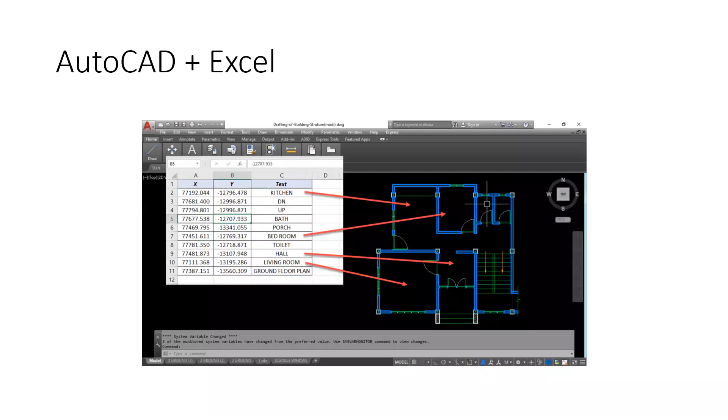Okay, so this is a very good decision, and I think they will be a game changer in the future because now they have expanded their business to the Saudi Arabian region. And very good news for you, ICC, International Construction Consortium, is also going to expand their business into KSA, Saudi Arabian region. So it will be a very, very good opportunity for Sri Lankan quantity surveyors.

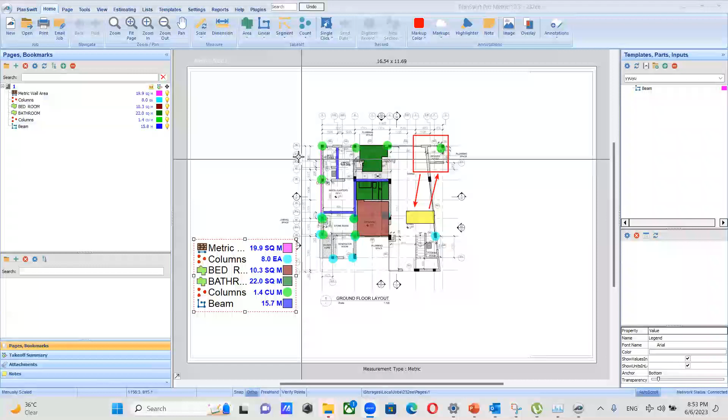A lot of people think this PlanSwift software is a very basic software and very easy to learn. But in order to get the fullest efficiency out of this software, you have to learn it in depth. I will explain one by one. This is very, very interesting. Please observe. I will share my screen. Yes, this is my PlanSwift software. This is a very popular software among construction professionals.

I will go to new and start a new job. I will put 67676, then I will put a description as training new batch. Then I will click next. Then I will select a drawing, click next, click next again, and finish. So this is a drawing I have put into this PlanSwift software. You can see this is a PDF drawing. Now you can measure this drawing very easily.

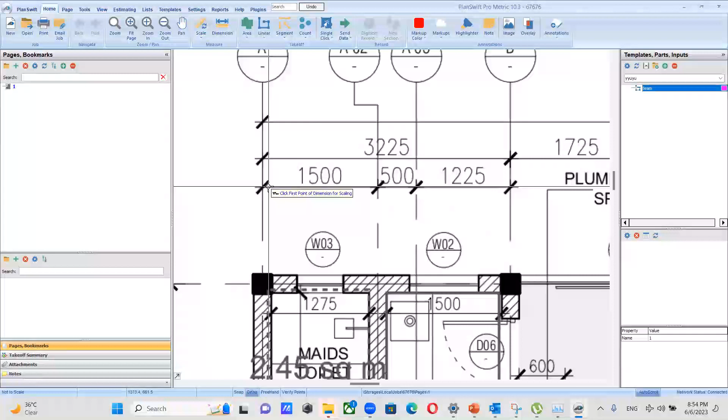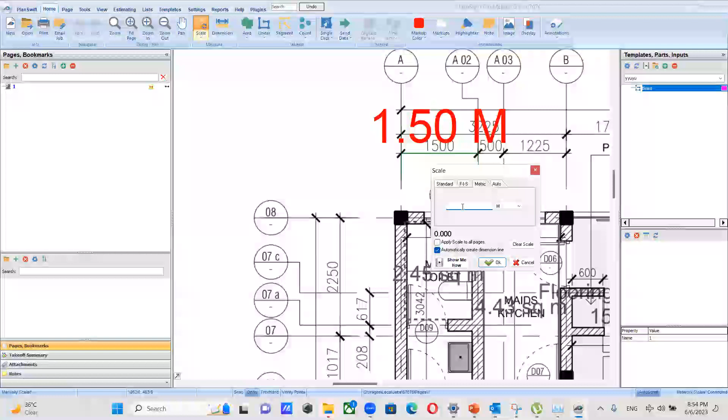Before measuring the drawing, you have to scale the drawing. How to scale the drawing? You can go to the scale, then give a scale. This is 1.5, then click OK. Click here and click here. Now you have to scale here to here, and here to here also. Again, you have to click on the scale. Then this is 2.250, and click OK. Then you can scale this as well, here to here. Very easy.

Okay, now you have scaled your drawing. Now you can start the measurement. You can do all the measurements by using this Planswift software very easily. So if you want to count, you can click on count and I will rename this as column. Then I will click OK. And you can easily count 1, 2, 3, 4, 5, 6.

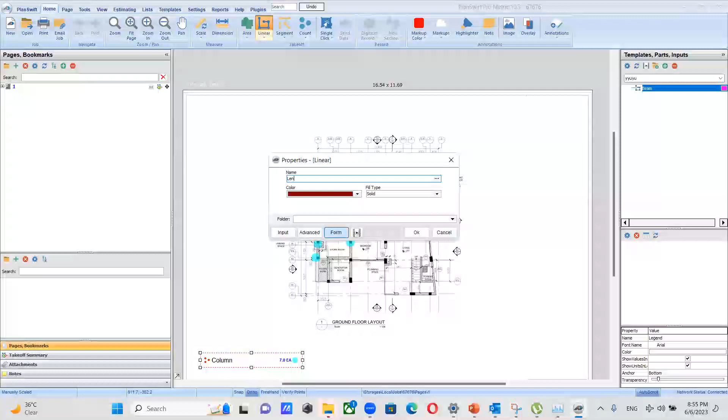Likewise, you can count. After you right click and click on stop, then you can again right click and show legend. You can see the quantities as well like this. So this is how you can measure by using this Planswift software. Not only this, but also you can get linear measurements, so you can measure length of wall. You can get the linear measurement like this. Very easy.

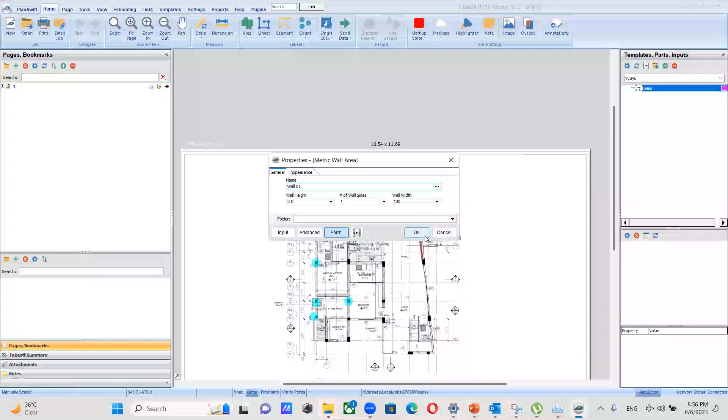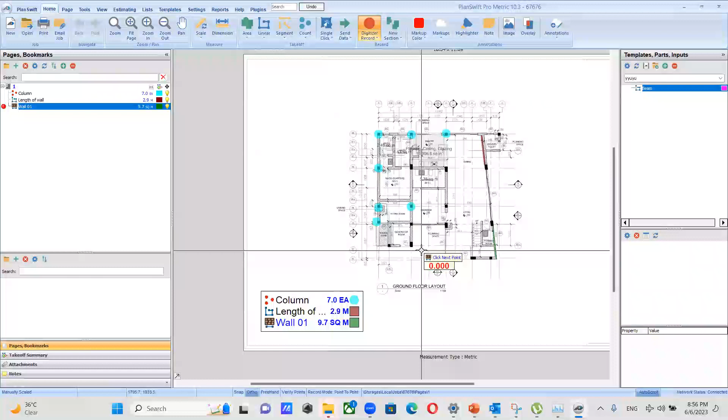Here, if you want, you can get wall area. So you can give height to this wall. This is wall number 1. It's very simple. Like this, you can measure the wall height. Sorry, wall area. So this is wall 1 area. Like that, you can do all the measurements by using this Planswift software.

So I will show you another trick. If you want to measure the manual area, I will measure this particular area. You can easily do it. You can easily measure the area like this. So you can do it very easily.

And if you want to measure the area automatically, you can use this single click option. Then you can rename this as storeroom and get the quantity very easily by double clicking. Like this, you can double click and get the quantity. See, double click and get the quantity. Nothing to worry about. You can get the quantity very easily. So likewise, there are a lot of methods to take off quantities by using this Planswift software.

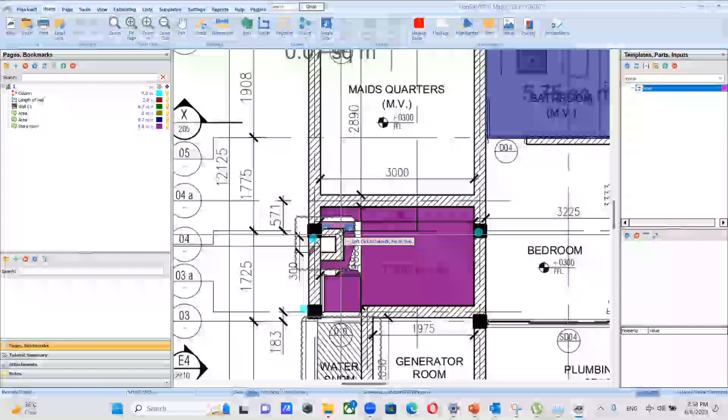So, but what is the difficult part? Sorry. What is the difficult part of this? So we have to address that difficult part. These are just regular measurements. We can measure area, we can count, and we can measure the length. So these are regular measurements.

What if we want to measure the formwork area of our beam? What if we wanted to measure the area of duct? So we have to measure those kind of things. That is the complex area of this Planswift software. Personally, I feel this Planswift software is a coding software. You can create your own measurements and you can measure after that. So that is the beauty of this Planswift software.

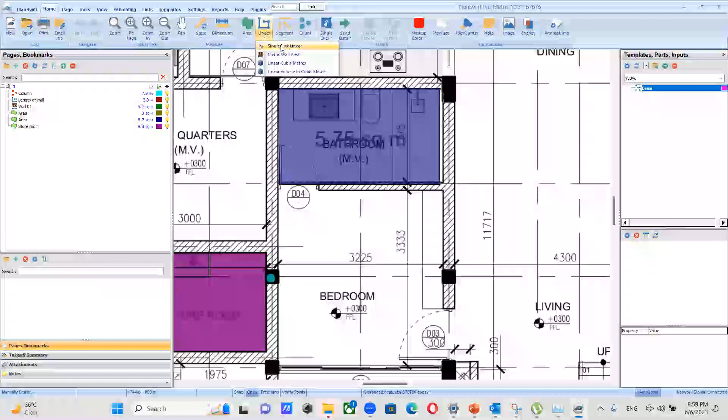I will start with a very simple example. This is very easy. I will get this particular column. I wanted to measure the formwork area of this particular column. We can easily do it by using this wall area method. We can get this linear and click on this wall area, and you can give the height as 3 meters. Then I can click OK. Then we can measure like this. So like this you can get the formwork area for the wall.

Okay, please mute your microphone.

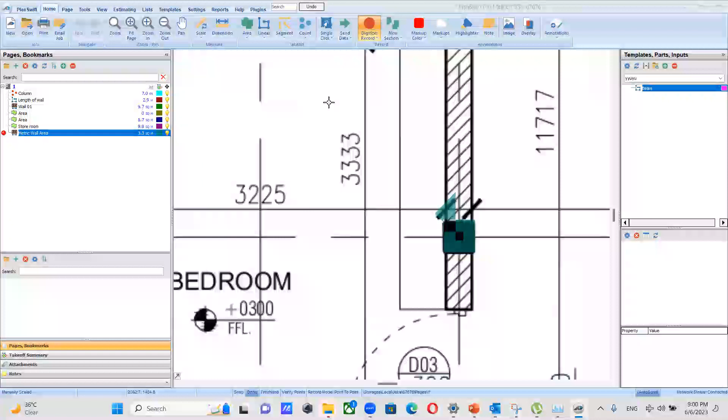But we can use a different method as well. I'll show you how to do it. I'll delete this particular measurement. You can create a template. You can easily go to these templates. Then you can go to this new tab. I will rename this as training one. Then I will click OK.

Then I will use this count function to measure the formwork area. I'll give this count. Then this is formwork area. Then I will click OK. Then I will double click on this and I will go to advanced. Then you can create your own formula for this particular element. This is very simple.

I will click here. So I need the width, length, and height of our column. So this is width. Very simple. Then I will put it under estimating. Don't think about these things right now. Just observe the process. This is length. Very simple. I will click OK, and this is height. I have length, width, and height.

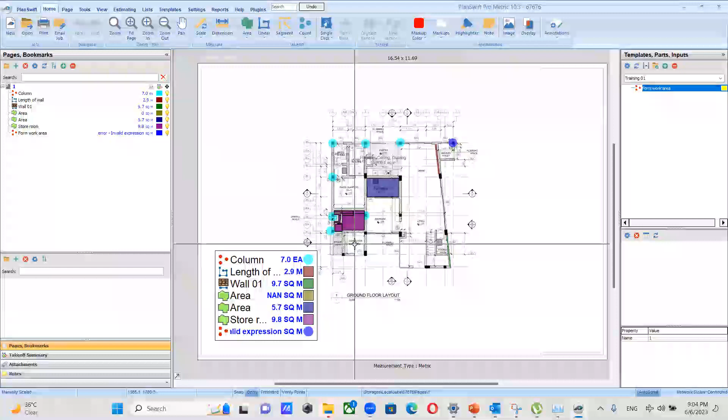Take off. Okay, I missed the multiplication sign. Okay, so you have to be careful. I'll double click this. Okay, then again, formwork area: height 3, length 0.225, and width 0.225. Then you can take off quantity, okay, like this.

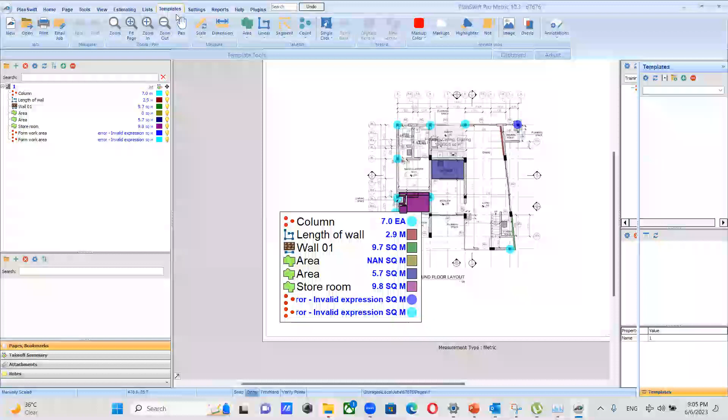Go to templates. I'll change from here. Multiplication sign, and click OK. Then I will come back.

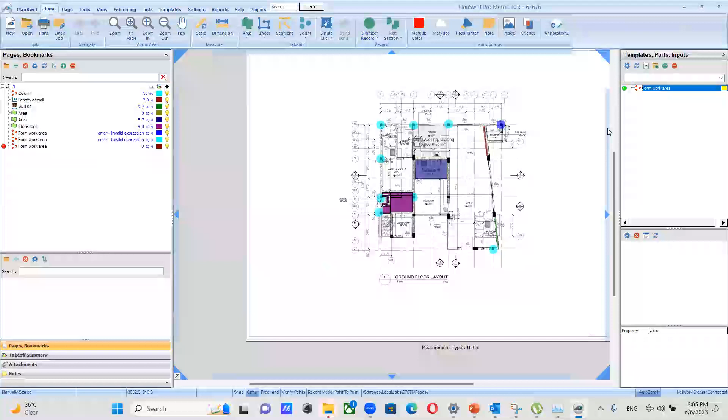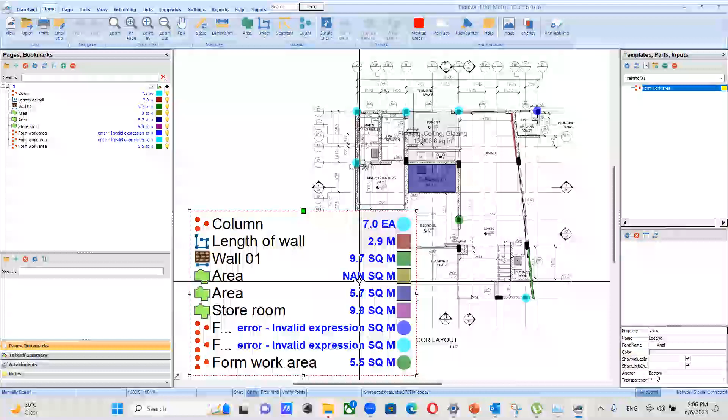Then you can see this is formwork area. You can see the quantity as 5.5. Okay, so likewise, you can create your own template and measure entities. Okay, so this is a very good example for that. And I will do another example. I will measure a duct area.

I will get this point where in duct measurement drawing, and I will click on next, and finish. Okay, so this is my duct measurement drawing. So I'm going to measure this particular duct. Okay, so I want the area. So this is very simple.

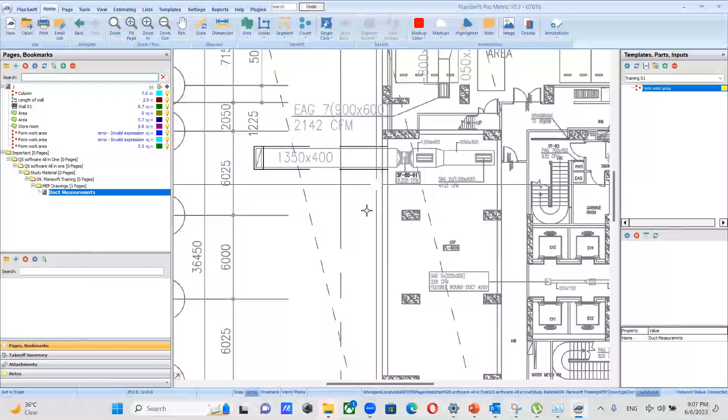We can go to templates and create a simple template. I can go to this linear measurement. Okay, so I will put as duct area. So I'll click OK. Then double click on this and click on advanced. So what we need to measure the duct area. Okay, so this is very simple. I will go here and I need width of this duct, width of this duct. Then this is estimating, and I will, okay.

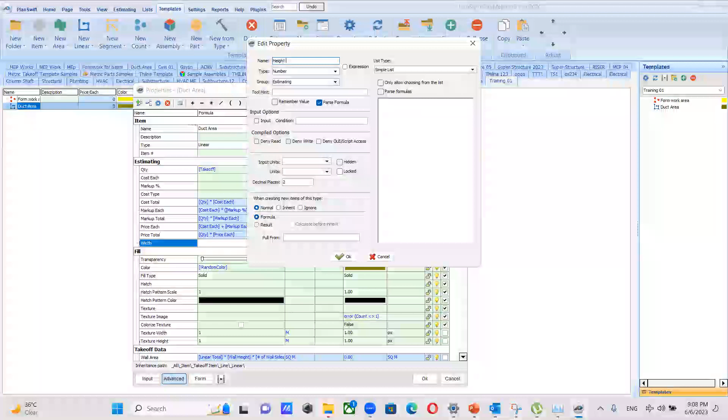Then I need height of this duct, height of this duct. Then I have already this length. Then I will add another one: this is sectional length. This is also important, this is the sectional length. Then I will put this little bit top.

Okay, then I will create the formula. So I can get the sectional length very easily by using 2 into width plus height. Okay, I hope you can understand this. So this is the sectional length. Okay, so you know.

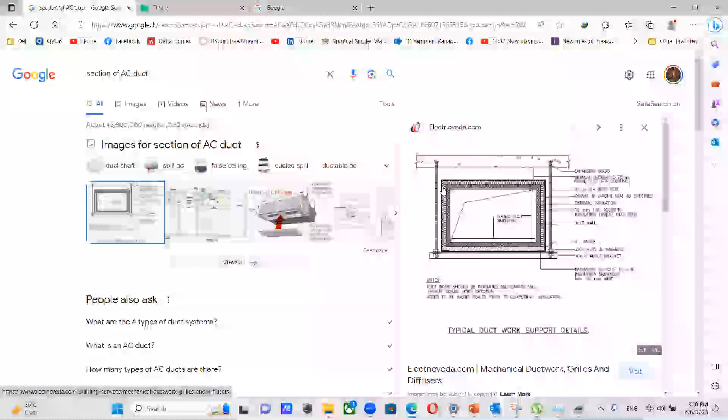If I show you a sectional... section of duct, AC duct. Okay, so you know, it's like this. Okay, this is width and this is height. Okay, so you can get this sectional length by using 2 into width and height, sorry. Okay, then you can get the sectional length very easily. Then you have to multiply this sectional length by the length.

Okay, so come back to this software. Okay, so this is width and this is height and this is the sectional length. Now again we have to give the units. This is meter, this is meter, and this is also meter. Then we can multiply this sectional length from this takeoff. Okay, then this should be square meters, no?

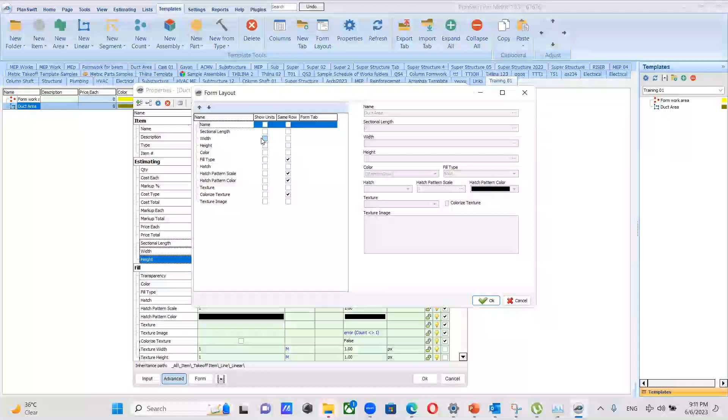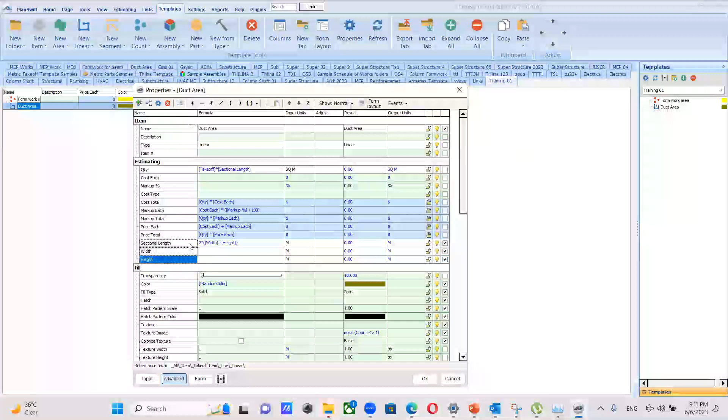Yes. Okay, then I will go to this form layout and add - before that I will add them to my form layout. Then I will give some units to these things. Okay, width, height, then sectional length also I will give a unit. Okay, so now we can start now. So this is the quantity and this is my formula. Then I can click OK.

I can come back to my home. Okay, then I can measure. So this is duct area. I will double click on duct area. Before that, I have to scale the drawing. So this is vertical scale 7.15, 7.150. Now click OK and scale the drawing first.

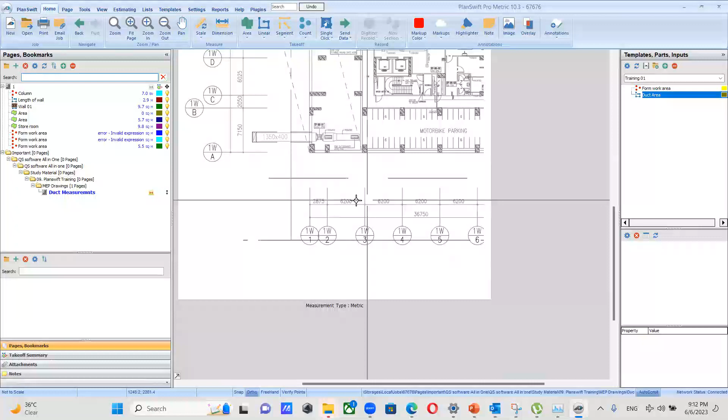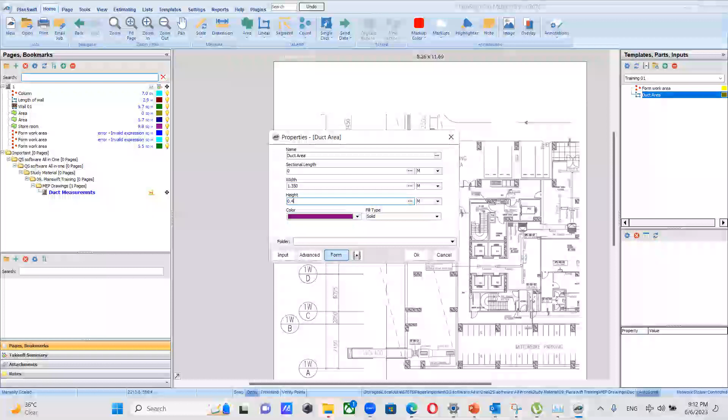Okay. Then I will scale this horizontally as well. Yeah, 6.2, 6.2. Okay, now I have scaled this horizontally and vertically. Then I can measure. Okay, so what is width? It's 1.350. Height is 0.4. Then I can click OK. Then I can start measuring. Okay, very simple. Okay, like this I can measure.

Then right click, stop, right click, show legend. You can see the quantity like this. Okay, so this is the magic of this Planswift software.

A lot of quantity surveyors and other construction professionals use this. This is very preliminary software. We can easily measure quantities by using this Planswift software. We have to only use this dimension, area, linear, segment, and count. Nothing to worry about. But if you want to get the fullest efficiency out of this Planswift software, you have to have very good understanding about these templates.

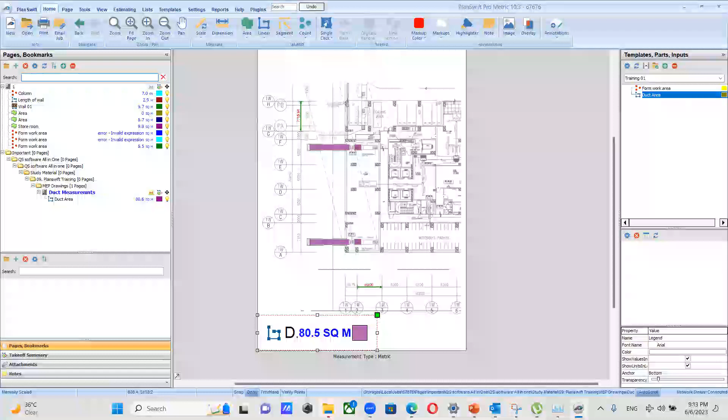So you can create your own templates and measure. I have created a set of my own templates. Then based on that, I can measure anything by using this Planswift software. I will show you. This is very important.

My lecture note. This is very, very important. Think about this: QS software all-in-one, then study materials. So these are my lecture notes. With these lecture notes, you can revise your memory anytime. This is lot 1, lot 2. This is my Planswift training note. This is for substructure.

This is the content. Under substructure, we will learn removing trees, site clearance, site preparation, excavation, earthwork support, excavate, plus retaining excavated material, backfilling, leveling, surface treatment. We will learn everything.

Then when connecting with Excel, existing quantity has to be considered. I will show you how to connect with the Excel software and directly put those quantities into the Excel software. So this is very important. I will show it in the lecture. This is very important.

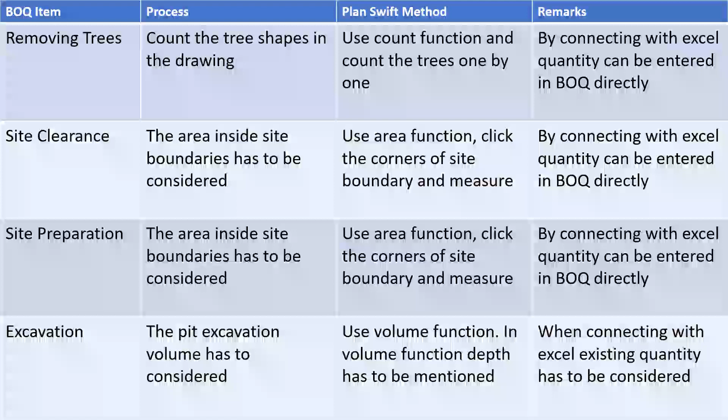So everything has been explained step by step by using these lecture notes. After finishing this lecture series, you can go through these lecture notes and revise your memory very, very easily. This is very important.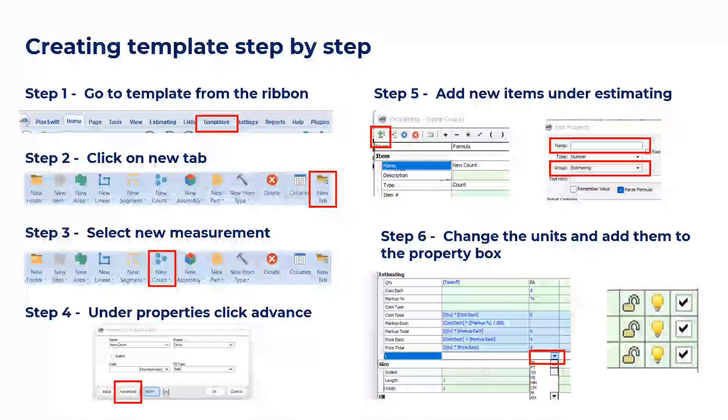Then I have introduced a new concept: pre-recorded video concepts. Sometimes you might miss the classes, so I have this pre-recorded video concept. If you miss any class, you can go through the pre-recorded video and get all the knowledge within a short period of time. If you want, you can go through the recording and grab all the things and...

Learn all the tricks. In this interactive training, I will teach you a lot of tricks, a lot of easy methods to measure, but the normal content I have recorded in a pre-recorded video, and you can go through the pre-recorded video and revise your memory very easily. Sometimes we forget things, so before the class you can go through the pre-recorded video and revise your memory and get ready for the class.

This is a very new thing, and nobody does this, but I have introduced this new concept. It's actually a huge disadvantage for me financially. What if someone gets these pre-recorded videos and uploads them to YouTube? It would be a huge financial disadvantage for me, but I took that risk because I want you to learn this software under any circumstance.

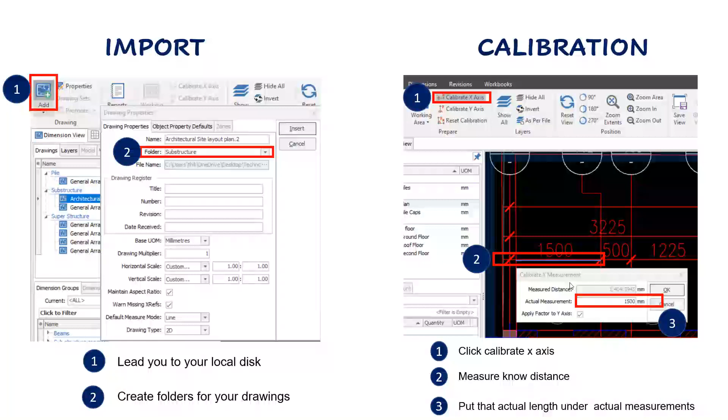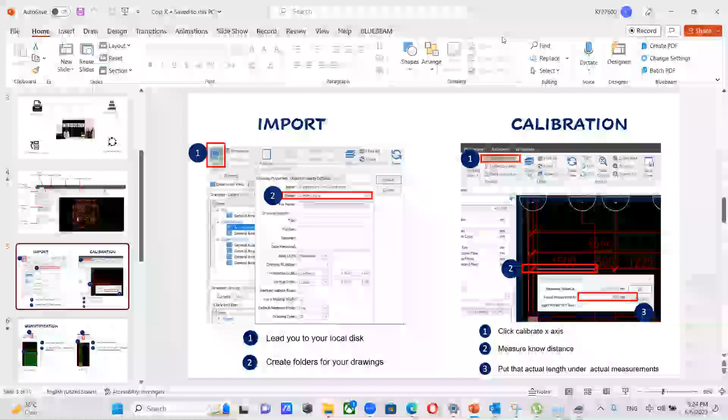Mr. Pradeep, I will show you the pre-recorded video I have prepared for that, so you can get a very good understanding of this pre-recorded video system. Please give me a moment, I will share that pre-recorded video of this wall part. This is very important.

It's a very good question, Mr. Pradeep, and with that question we can explain the importance of this pre-recorded video concept. Actually, it is a huge disadvantage for me personally, but I have to take the risk. Ultimately, Sri Lankan quantity surveyors have to gain the benefit of this. You will realize it with time.

Okay, so right now you might migrate to Oman or UAE or any other country and obtain a job and earn a lot of money. Okay, so yes, we have to work hard and earn money. Okay, so after some time we will realize we have to give something back to the society. Okay, so I also like that.

I started my career back in 2019. Then I worked very hard. Okay, so in 2021 I became the best sales manager for CCAS Private Limited. Then I completed more than 5 construction projects by using this CostX 5D software, and I earned reasonable money. Okay, now I realize I have to give something back to the society.

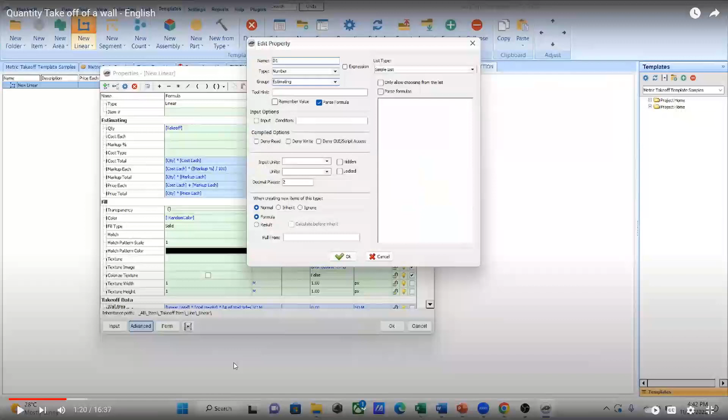Okay, as you can see, we can create a template for these walls. Okay, so this is a template. Okay, like this, you can create a template. So you can see quantity, width, height of D1, D2, like that. You can create a template.

Okay, so this is D1 quantity, this is D1 width, and this is D1 height. Okay, then this is D2 width, D2 height. Okay, like that you can create a template like this. So this is the template part. Then I will put units to this template. Then I will create separate sections for doors and windows by using this template function. Okay, I will explain all those things and I will train you interactively with regards to this wall creation.

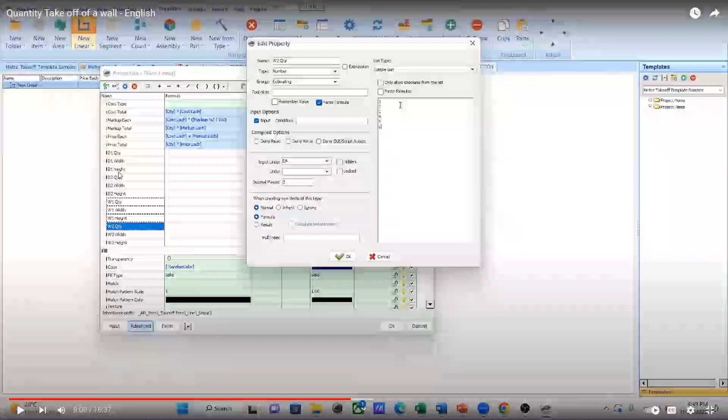Okay, then you can see this is a small formula. So this is D1 quantity, D1 width, and D1 height. If you multiply D1 width, D1 height, and D1 quantity, you can get the cumulative area of D1. Okay, then you can get the wall area by multiplying length of wall and height of wall. Then you can deduct these doors and windows by creating a formula. Okay, I will show you the formula.

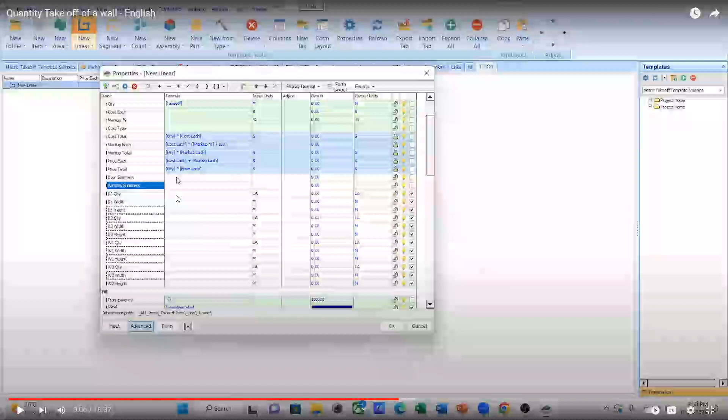Okay, like this, you can create a formula. So this is door summary. Door summary means D1 quantity into D1 width, D1 height, plus D2 quantity, D2 width, D2 height. Then you can get the cumulative area. So after getting door cumulative area and window cumulative area, you can easily deduct them from wall cumulative area. Then you can get the wall quantity very easily.

So I think this is a very good example for that. Okay, you can see. This is the formula. So everything I have explained in this video. So nothing to worry about. You can get a very good understanding about that. Okay. So I will explain those things under architectural measurement. So in fact, I will show you, Mr. Pradeep. I think I have the note for that particular section. PlanSwift training. I think under note 3. Okay, structural and architectural measurement.

Okay, my dear, please mute your microphone, my dear students.

Okay, so Mr. Pradeep, as you saw in that video, D1 quantity, D1 height, and D1 width have to multiply. Then you can get door summary. Then window quantity, window height, window width, you can multiply together. Then you can get the window summary. Then wall length into wall height, then you can get the wall area. Then you can deduct this door summary and window summary. Then you can get the cumulative area for the wall.

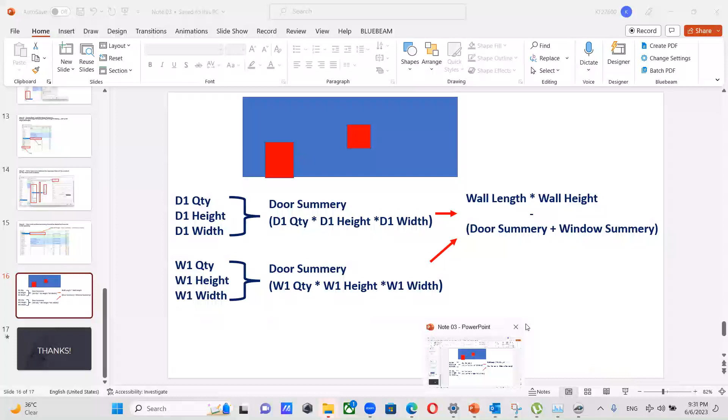Then I will open my CostX software. Then I will explain, yeah, for reinforcement, how you can use PlanSwift effectively, like additional bars and mesh? Yes, I will explain it during the session. So I'm covering the structural, architectural, MEP, and reinforcement. So during reinforcement, I will explain how to create the mesh and additional bars and all. Okay, no need to worry about it.

So now I will explain about this CostX software, because we're running out of time. Okay, I will give you all the notes. You can go through them. Okay, so this is CostX software. In this CostX training, first I will explain about the substructure part.

Yes, I will explain. Okay, so this is substructure. So I will explain all the elements with regards to this substructure. So I will delete this and I will import my substructure file. Yes. Desktop. Okay, today's session is just an introductory session. You will learn all the things comprehensively in the training.

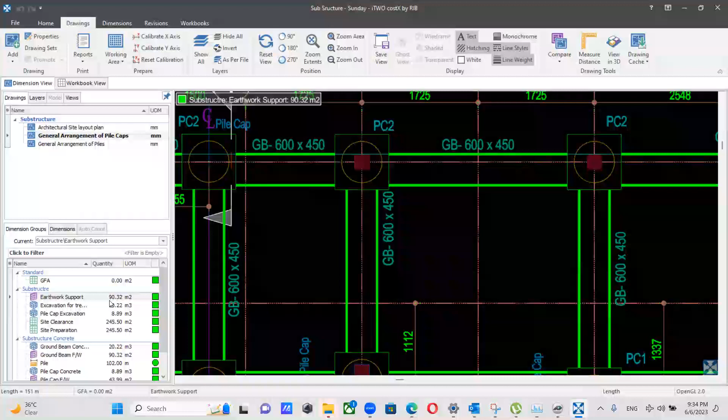And as you can see, if I click on this particular element, this is earthwork support. If I delete something, please observe this quantity. This is 90.32. If I delete something, you can see this quantity changing. See, so you can put the quantity, and in the meantime you can see the difference of these quantities. So this is very important. So if you select a few quantities and delete those quantities, I will select this one, this one, this one, and this one, and I will delete this. Okay, you can see the quantity difference.

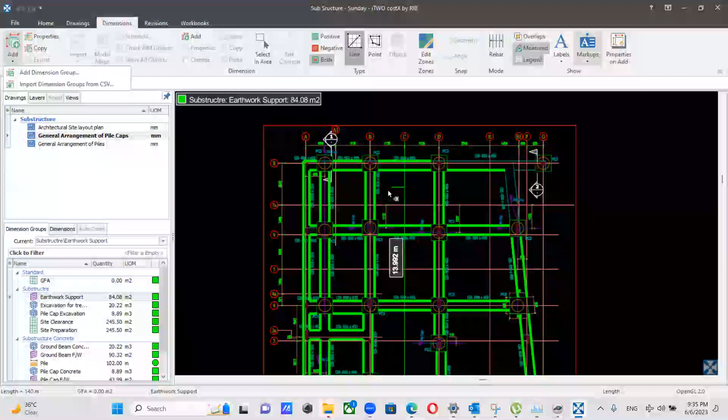Then if I start a new dimension group, let's say I want to measure this area. I will put area. So area and click insert. Area and substructure. Okay, I can see this area. Now you can see the quantity is 0. So if I start to measure, you can observe the live changes of this quantity. So this is very important. You can see the quantity here and you can measure it here. So this is like a combination of Excel software and AutoCAD software. This is very important.

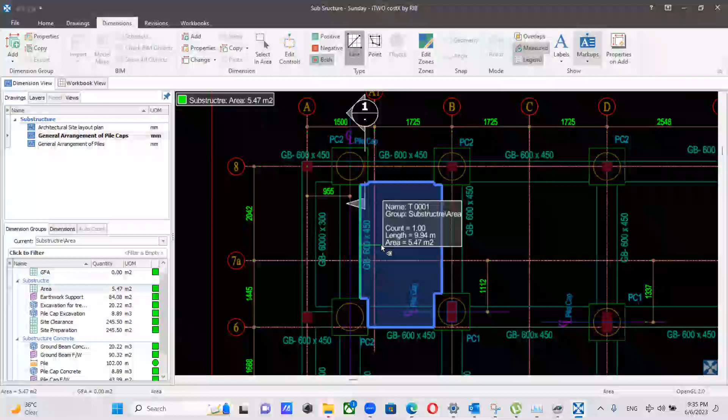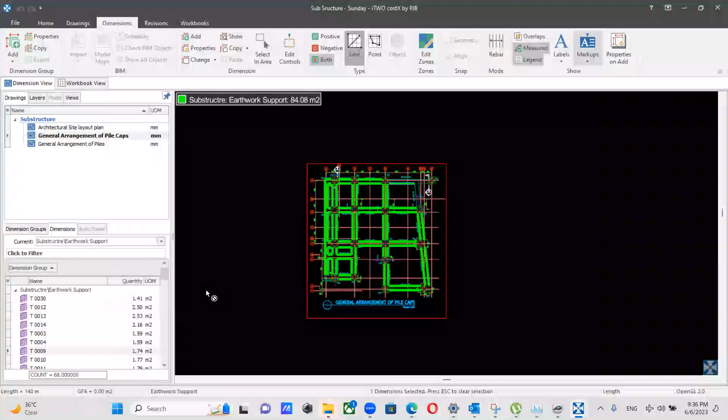Then if you go here, you can get quantities individually. If you go to dimensions and click on this, you can get quantities individually. If you click here, this quantity will highlight. You can get all the quantities individually. This is very important. So you have to learn all those things during the interactive training. And just like PlanSwift, you can measure area, you can measure length, you can count elements by using this CostX software very easily. So you can see here you have to give a name to your dimension group.

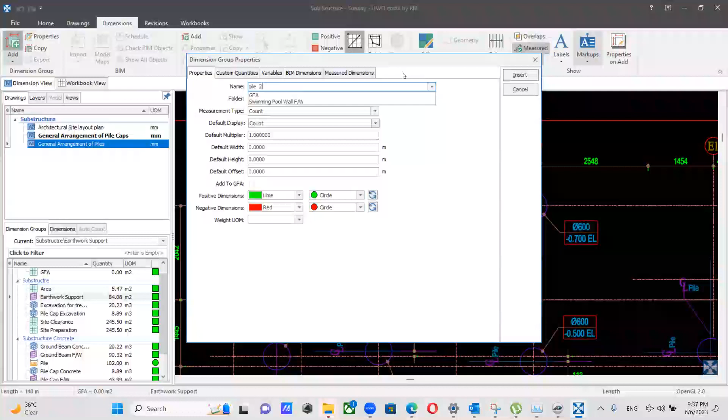So I will give pile here. I want to count piles. Then I will put count here. Then default display also count. Then I will click in pile 2. Then I can easily use this point function and count these piles. So likewise, we can count, we can measure lengths, we can measure areas by using this CostX software. So it will be very, very important for you to learn all these things.

So under substructure, we cover earthwork support, excavation trenches, pile cap excavation, site clearance, site preparation, ground beam, then everything, surface treatment. Everything we will cover under substructure. So after this, you can get a comprehensive knowledge about substructure measurement. So you can do the assignment very easily after learning this. So I will interactively train everything, and I will give you some insights. I will teach you some easy methods as well. So then you can get a comprehensive knowledge and you can uplift your professional career.

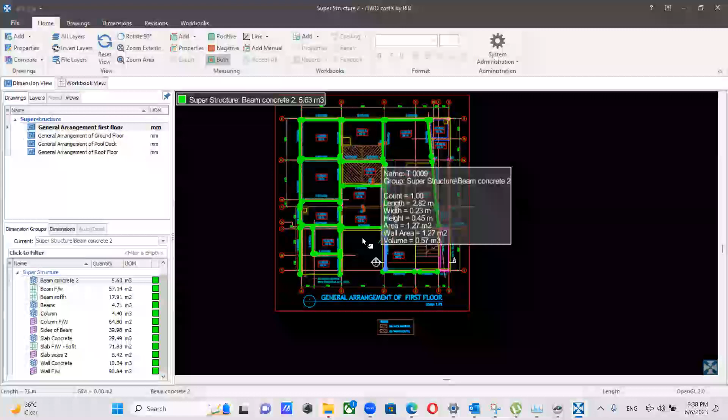Then this is it. Then I will import another section. So this is substructure. Then I will import the superstructure part. Okay. It's very important. So under superstructure, I will cover beam. You can see beam formwork, beam soffit, then column formwork, sides of beam, then slab concrete, then wall concrete. So all the things will be covered under superstructure. This is also very important.

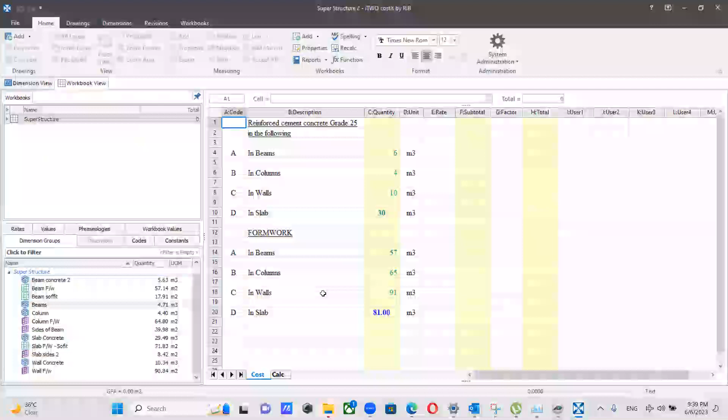Then after getting all the quantities, I will guide you to prepare the BOQ. So this is the BOQ. I will teach you how to enter quantities into this BOQ. This is very simple. You can just drag and drop. Then architectural.

Okay, so this is very important. A lot of people think this architectural measurement is very easy, but you have to work hard to take quantities for these architectural elements, and you have to learn a lot of easy methods. Then only you can easily finish everything related to this architectural measurement. So I will guide you.

You can see this is my architectural drawing. So I will teach you a lot of easy methods. You can use this layer function very efficiently and effectively in order to measure architectural elements. So I will click on layers, all layers. So this is my drawing. Then you can see I will get this skirting, finishes, wall.

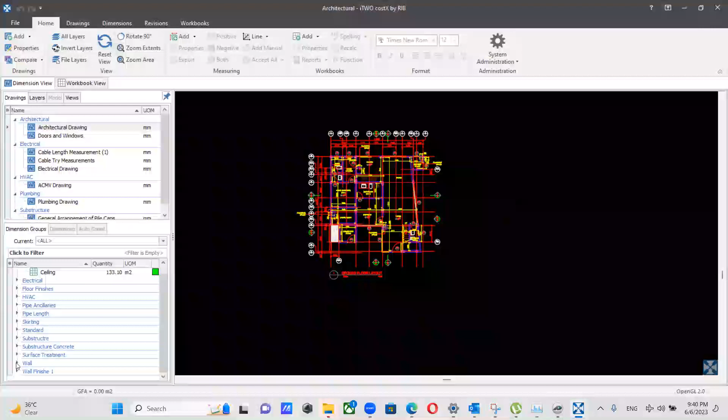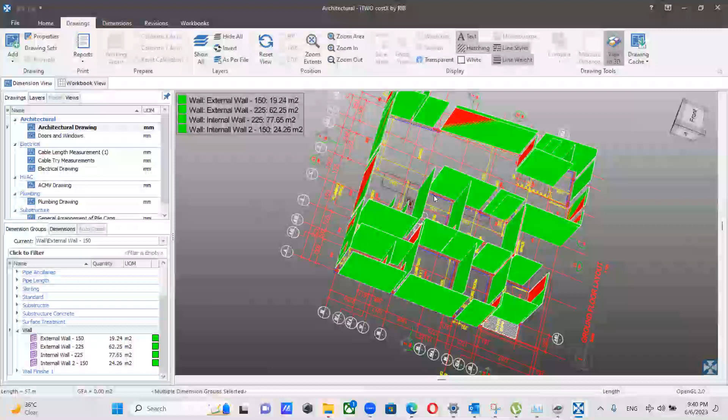You have to measure very well. You have to consider the time efficiency, then you have to consider the accuracy, then the presentation is also very important for quantity surveying. So I will guide you on all the things related to these architectural measurements as well.

Okay, then reinforcement. I will teach you beam reinforcement, column reinforcement, pile cap, slab, wall. Everything. So after getting this knowledge, you can measure any quantity by using this software. After that, I will guide you to prepare the BOQ as well. So this is very important.

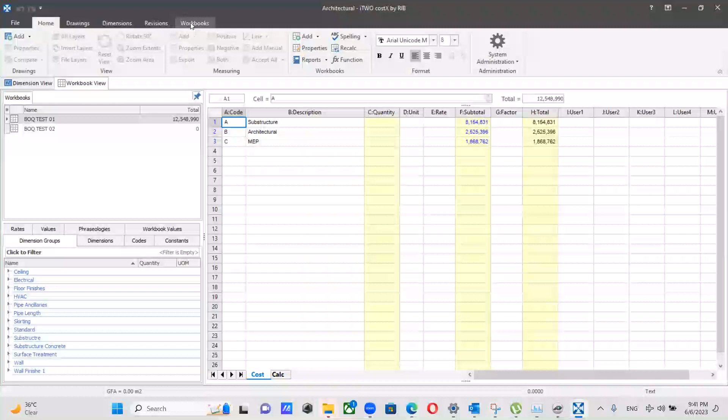And the other thing is, after getting all the quantities, you have to create the BOQ. So this is the BOQ. I will teach you how to do it. You can go to workbooks and click on reports and print workbook. So this is one workbook I have created earlier. This is BOQ S1. Then I will click on edit. Then I can preview it.

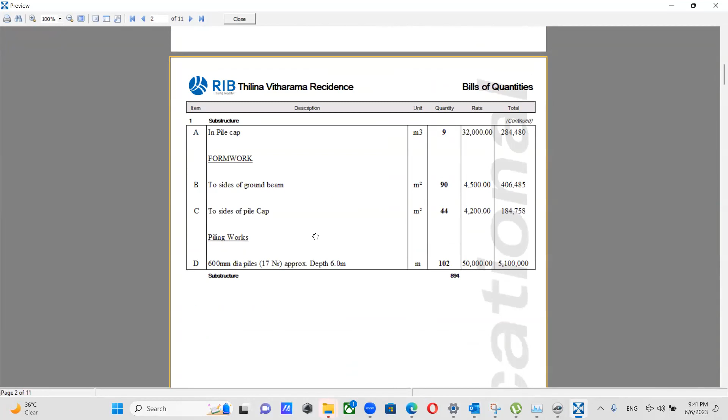So after finishing everything, I will guide you to create a comprehensive BOQ like this. You can see A, B, C, D, E, F, G, H. Again, A, B, C, D, E, F, G, H. I will show you a standard format, and I will guide you to create a BOQ according to that standard format. I will give you in-depth knowledge in CostX as well. This is very important. I will cover everything. Nothing to be worried about.

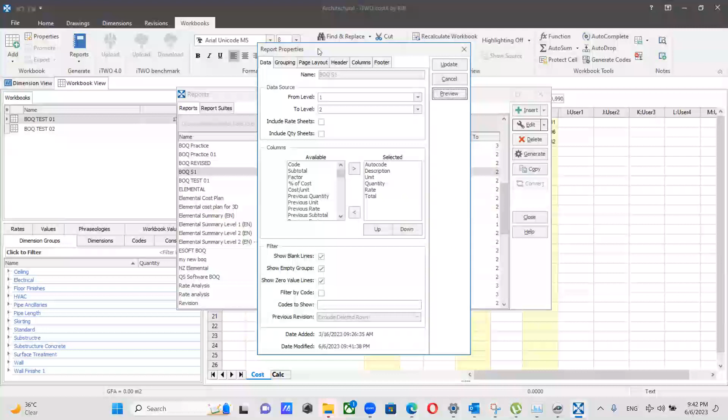I will guide you to create the BOQ. Then I will guide you to compare a couple of drawings and prepare the variation report. Then I will guide you to measure a 3D model, and after that to take off quantities of that 3D model. I will train you interactively, so you can get all the knowledge within the class, then you can practice after that.

A lot of junior quantity surveyors have obtained jobs based on this knowledge, and they have personally thanked me. Recently one of my students, Mr. Achinta from University of Moratuwa, got a job in Soundstone, and he told me that this knowledge was very important for him to get that job opportunity. Earlier I mentioned my Dubai student, and a lot of students have obtained jobs. This knowledge played a critical part in that. So this is about CostX training.

Then I will explain about the Bluebeam Revu software as well. I think you have got a very good understanding of our process. Before that, I will show you my CostX lecture note. This is also very important. This is a comprehensive lecture note. I will go to my CostX lecture materials. I have given huge effort to design this course. I have comprehensively designed this course. I have put huge effort.

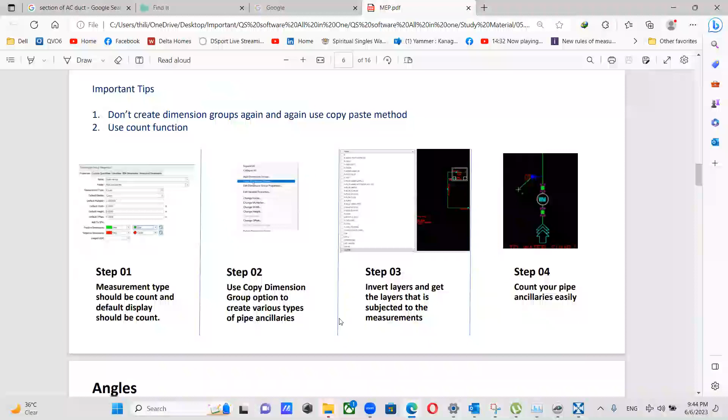You can see, I will show you my MEP note. In this note, everything has been explained step by step. Step one, get the dimension group. Step two, use the copy dimension group option to create various types of pipe ancillaries. Then measure. Everything has been clearly mentioned in these lecture notes. You all can get these lecture notes, go through them, and revise your memory after finishing the session. So this is very important.

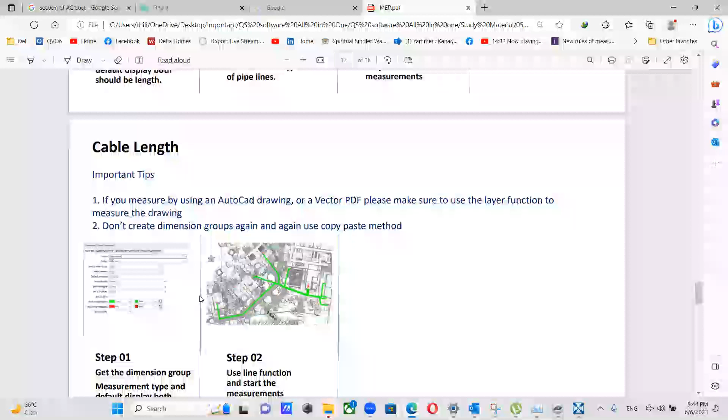So please get this knowledge, and you will have a lot of opportunities in foreign industries. This is actually $1 million knowledge. You can utilize this knowledge for your future careers. So please take this knowledge and develop yourself. So this is my CostX lecture note.

Then I will explain a little bit about this Bluebeam Revu software as well. Bluebeam Revu is also very important. So this is my Bluebeam Revu software.

I will share my screen. I think you all can see my screen. So we can use any software to make rate analysis with price breakdowns. Yeah, it's very important. So we can use any software, and I will separately guide you to analyze the rates in this CostX.

So first you have to get your rate sheet and convert it to CSV file. Then you can import it to this CostX software. Then you can create rate analysis based on that. I will show you. So rates. Okay, see, I have imported these rates to this CostX software. Okay, here labor rate, material rate. Okay, separately. Okay, then you can use this workbook and create a rate analysis.

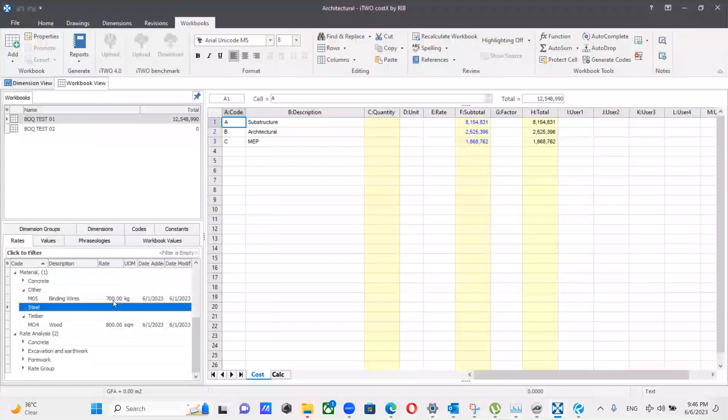Okay, use this workbook and you can create a rate analysis. So based on those rates, you can rate the BOQ. Okay, so it is possible. Okay, so if you can do the rate analysis in Excel, you can easily import that rate analysis into this CostX software. Then you can rate your BOQ like this. Okay, so you can just drag and drop and rate.

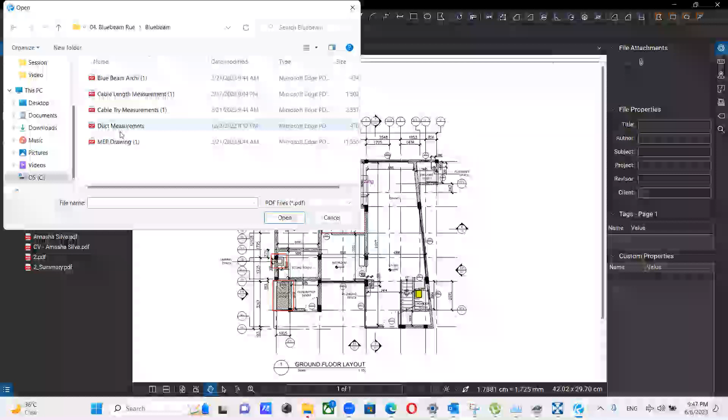So yeah, now this is my Bluebeam Revu software. I think you can see my screen. Then, yeah, this is my drawing. And I will import another drawing. I will go to files and click open. Then I will go to important and QS all-in-one, study materials, then Bluebeam Revu. Where is it? Yes, here it is. Okay, then I will click on this Bluebeam cable tray, Bluebeam marking.

Okay, you can see this particular drawing. And this Bluebeam Revu software is a PDF management software. You can do anything by using this Bluebeam Revu software. If I need to remove this legend from this drawing, I can do it by using this cut content function. I will click here and select this, and I can make these things disappear. If I want to make this disappear, I can click on cut, then select this, then this will disappear. So like that you can make things disappear by using this cut function.

Okay, then if you want to add text to this PDF, you can press T, then you can type anything. Okay, so this drawing is for training. So you can type anything. If you want to cloud something, you can press C and cloud. Okay, you can cloud this area. And if you want to put an arrow, you can press A and put an arrow like this.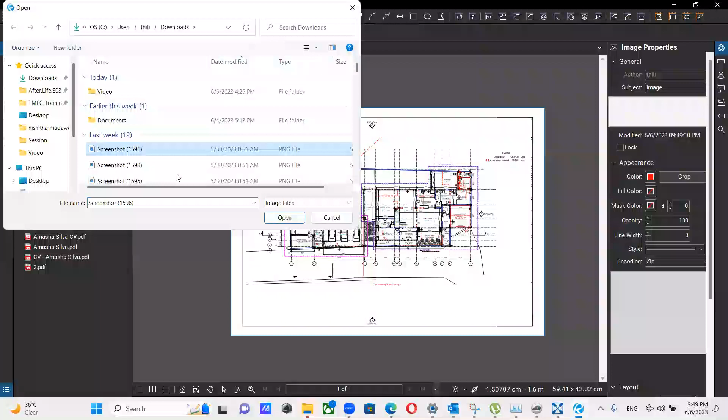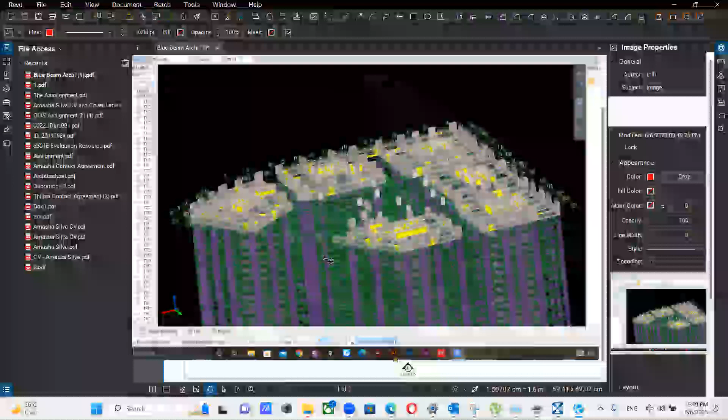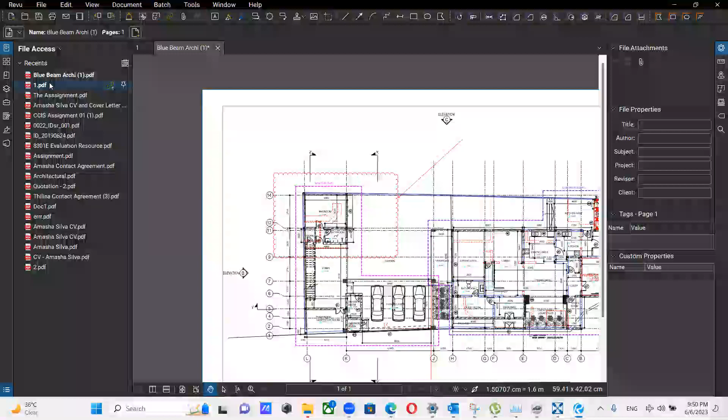Okay, so you can split drawings. So let's get another drawing set. Open, search in this desktop structural. Okay, I'll get this drawing set. So in this drawing set, you can see several drawings.

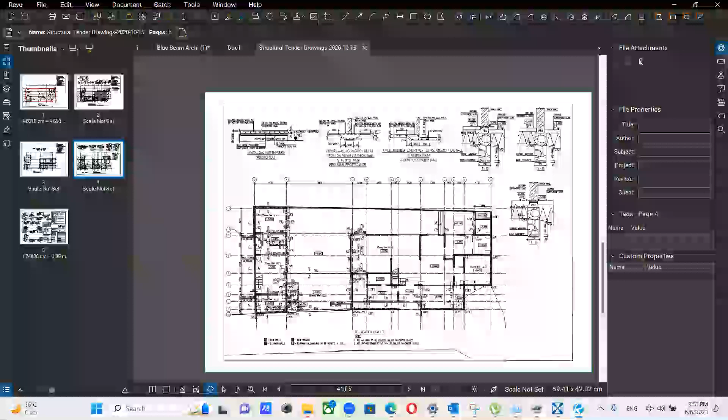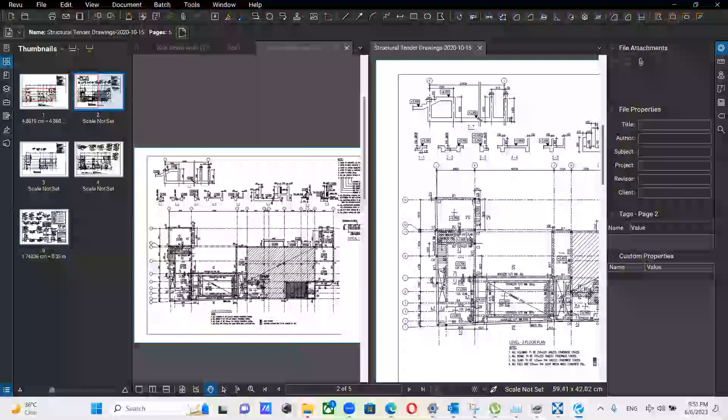Okay, so these are the sectional drawings of this particular drawing. Okay, so I can divide my drawing into two. So this is the plan drawing, and I will click here and click here, and this is the sectional drawing. So this is the plan drawing, and this is the sectional drawing. See. Okay, so this is the plan drawing and this is the sectional drawing.

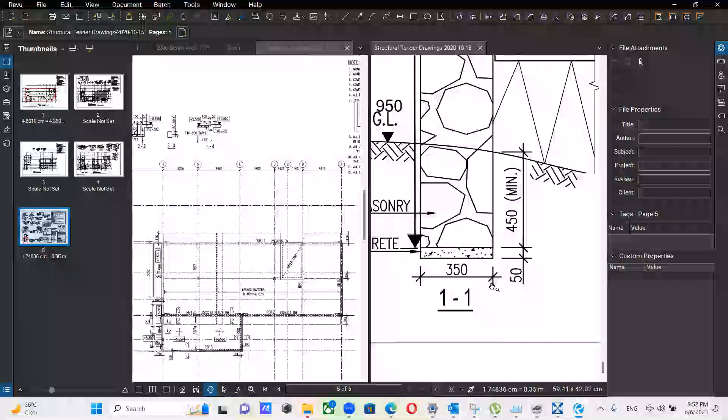Section 1.1. See, where is section 1.1? I can't find section 1.1 here. Okay, here. This is the section 1.1. Then I can open section 1.1 here and I can measure this particular quantity. This is my section 1.1. I can open section 1.1 here and I can measure the quantity here. Okay, so this is very efficient software. And I will come back to this stage.

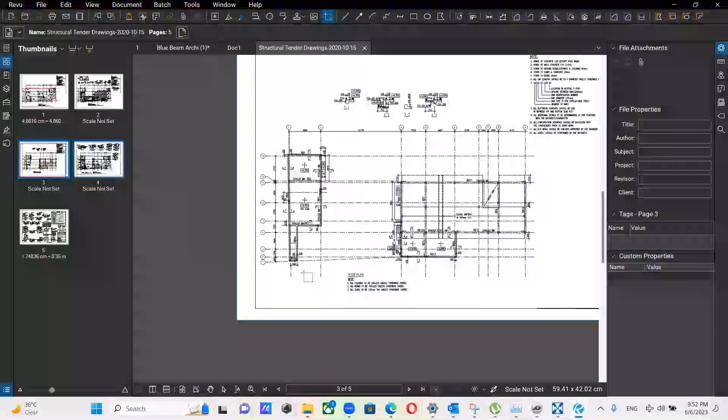And even if I need to have this section 1.1 in this particular location, I can go here and click on this snapshot tool. Okay, then I can select this section 1 like this. Then I can come back to this drawing, press Ctrl V and get this section here.

Okay, so this is section 1. I can have the drawing here, then I can measure based on this drawing. Okay, so this is very important. This is the PDF management part. That's why this software is popular all over the world.

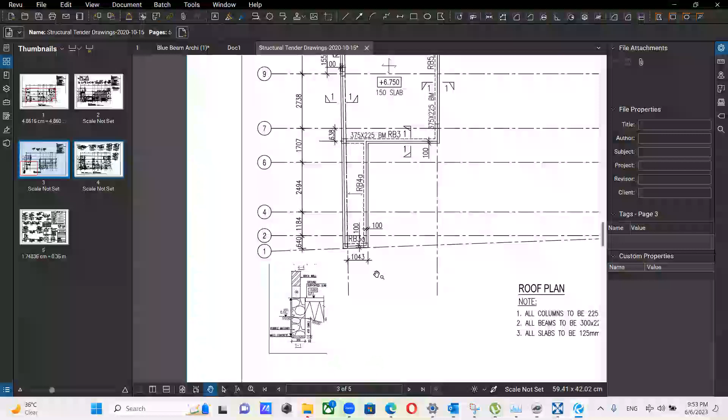And we can use this Bluebeam Revu software collaboratively with a lot of building information modeling software like ArchiCAD and Revit. And you can take off quantities using this Bluebeam Revu software very easily. You can go to tools and click on measure. First you have to scale the drawing.

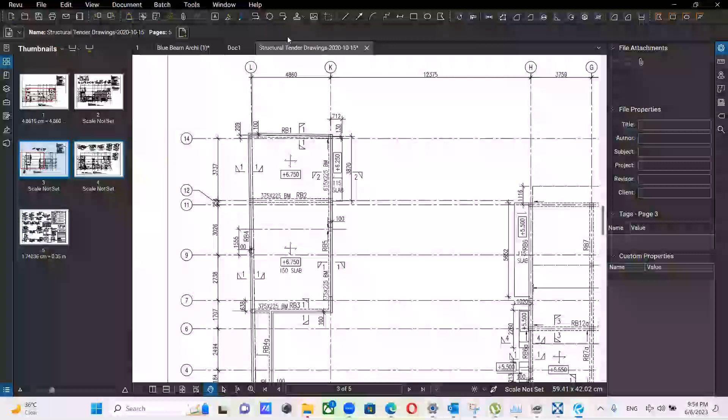I will use custom. Then I will calibrate using a known length. This is 3737. Okay, sorry, use measure, set the scale, custom, calibrate. Then this is the known length, 3737. Click here, then I'll put 3737 millimeters and apply scale. Now this drawing is properly scaled.

Okay, now I can start the measurement. I will go to tools and click on measure. If I want to measure the length, I can click on length. Then I can label this length. I will put beam length RB1. Then I can change the units. This is meter. I will change it to millimeter. I will change it to meters.

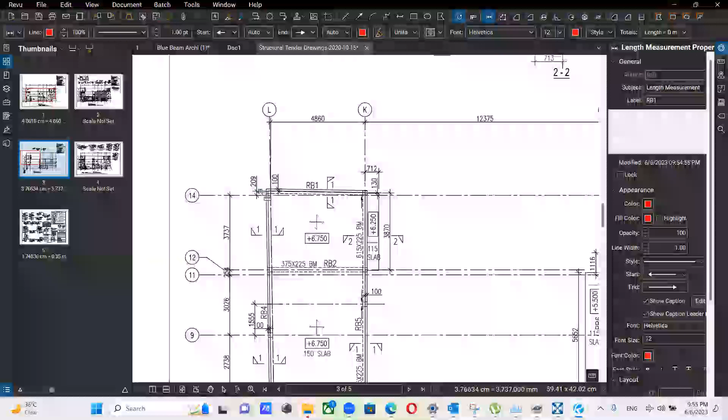Then if I want to have the wall area, I will give a depth. Sorry, wall area, I can give a depth, but this is beam length. Okay, I will go with it. Then I can easily measure this beam. So here you can get the quantity like this. So this is very easy.

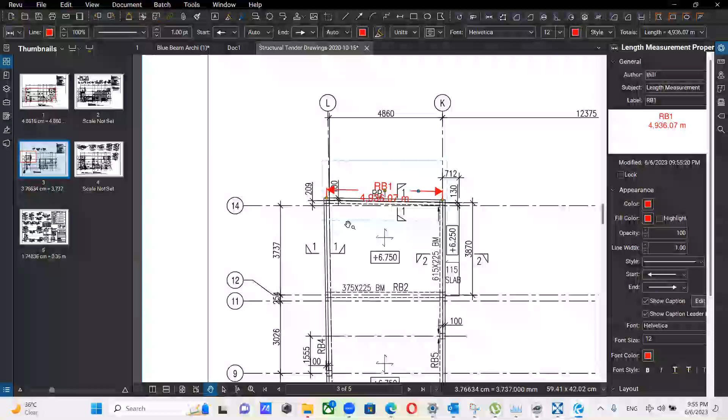After getting this quantity, you can click on this quantity and go up. You can see this quantity here. This is the measurement sheet. You can see subject, page label, author, date, status, color, length, area, wall area. You can get a comprehensive measurement sheet from this Bluebeam Revu software. So it is very important for a quantity surveyor to learn this Bluebeam Revu software as well.

So this is a basic understanding about Bluebeam Revu software. I will teach you this Bluebeam software comprehensively. I will teach you how to use this Bluebeam Revu software collaboratively with Excel. After measuring quantities in Bluebeam Revu, you can enter those quantities automatically into an Excel BOQ. So that is about Bluebeam Revu software.

If you have any questions regarding the process of this course, please feel free to ask. Until you prepare your questions, I will give a proper closure to this introductory session. Please give me a moment. I will open my lecture slide again.

Okay, so I'm very talkative and I talked almost 2 hours. It's because of this Toastmaster Club. I have done a lot of humorous speeches with the IQSSL Toastmaster Club. So if you want to improve your speaking ability, please join the IQSSL Toastmaster Club. You can improve it very well.

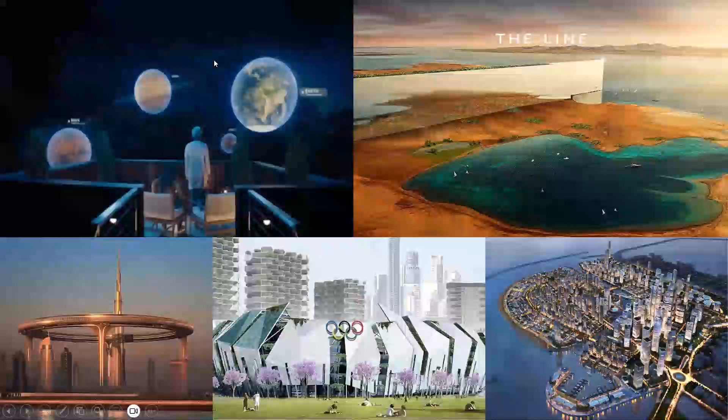The future of quantity surveying is very important, so first you have to be futuristic. In this first picture you can see virtual reality.

Facebook introduced this metaverse concept, and I think you know about it. If I explain this simply, now we use Facebook to go through a wall, see posts, and chat with each other on a virtual platform. In this metaverse, you can become a different character. If you wear a virtual glass, you can be a Superman in this virtual world and act like that character. That is the next level of socializing.

Now they are developing this metaverse, and if you are a UI engineer or can do graphic designing, you can get involved in this process. This is a very modern concept, and that is the future. In order to adapt to that future, we have to be prepared.

Think about this. You can see this is the Line project, the upcoming project in Saudi Arabia. They will introduce technologies like building information modeling, hologram technology, robotics, and drone technology in this project. In order to prepare for that, you have to learn those technologies.